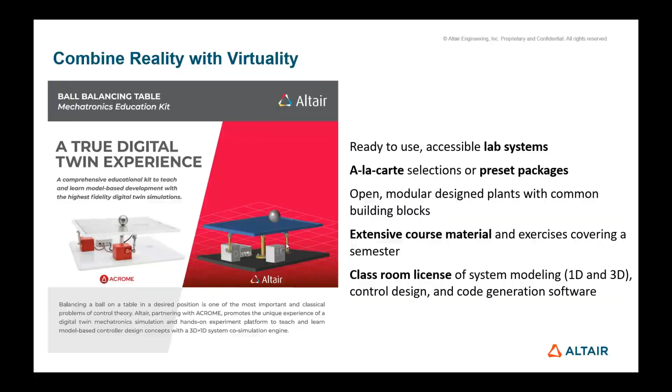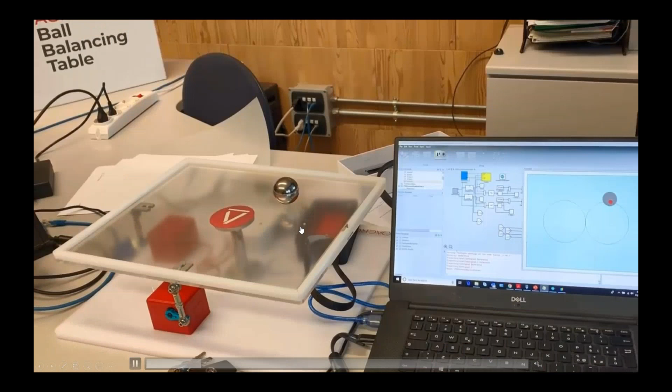I hope you can see the video. It's the ball balancing table, and here you see the control system activated. You can control it by the system itself, automatic control, or manually here.

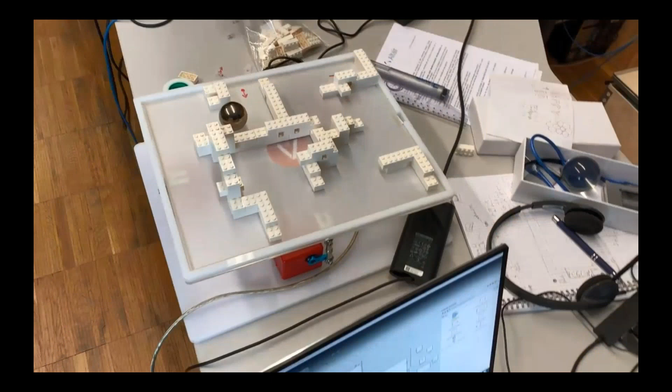See how stable the system works and the reaction time. If you'd like, you can build a challenge, for example for your students, to control the ball rolling through a maze in the most efficient way. That is always exciting for students to see.

By playing with that, they actually learn how these control systems work, how the interaction is between the virtual world and reality, the digital twin.

The second innovative solution we just launched is the combination of a written script, the knowledge, the textbook, and scripting in combination.

When you have a text, for example as a teacher, you'd like your students to read it and understand it. You can do it as before, like a PDF, with all your formulas and method descriptions inside, combined with an active script where you can go in, change the formulas, and see the results later on.

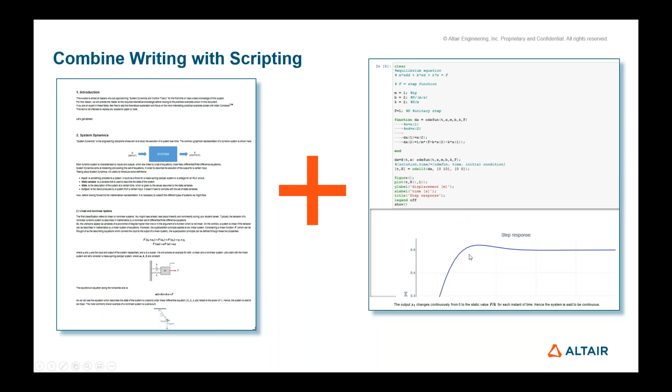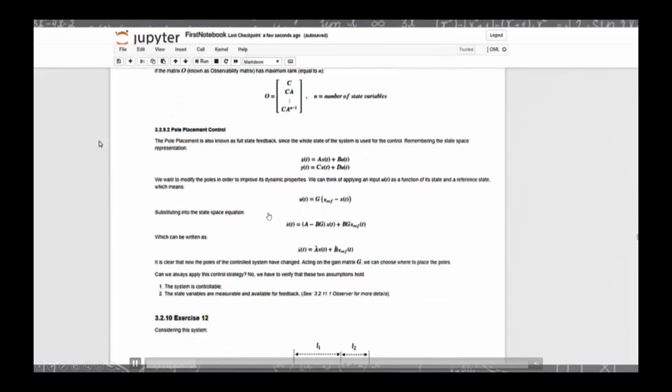This is what it looks like in action. It's a web-based tool. You have your text, your graphs, your math here, and integrated in between, these mathematical formulas become actually living, because you can execute them and see the response, the values, the results directly and immediately.

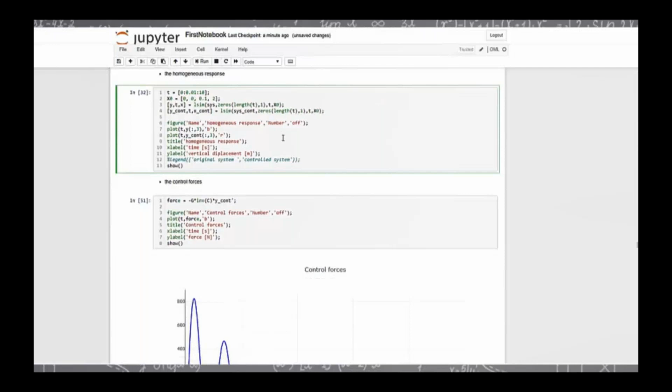Later on, you see how these formulas, these principles that you've learned as a student in the text, get a kind of lively reality. You can compare different parameters, for example of a pendulum, with different damping values, and see how that works.

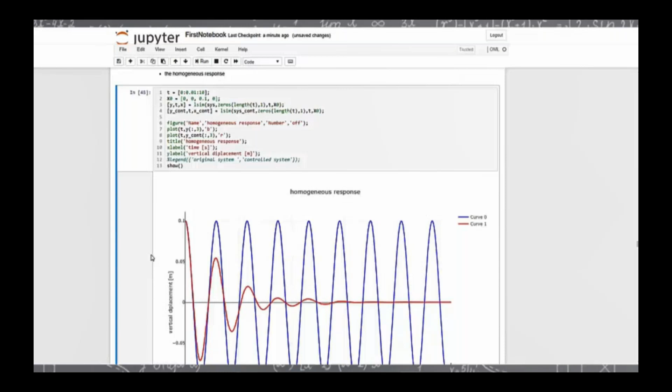As a student, you can combine both: you learn something and you explore by yourself, which is quite attractive for anyone who wants to explore on their own. So, some ideas and an overview of what we are doing.

I'm really happy that with Clive and Charl we have two partners in South Africa working with us together. Clive will concentrate more on classical mechanical engineering and control engineering, and I'm very happy that Charl is exploring new technologies with data science and IoT, which is key in the future. It's very promising that young experts go in that direction and explore all the possibilities.

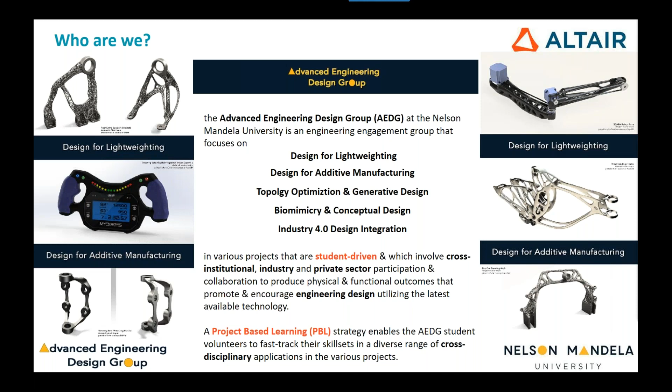Now, first of all, where are we? For those of you that are not too aware of South Africa, we are basically on the southern tip of Africa, and we are based in a town called Port Elizabeth, which is right at almost at the extent of the continent.

Now, in terms of projects, initial projects we were involved in the early 2000s were normal standard university projects like the Baja SAE, which we competed in for many, many years.

But in 2012, we took on a big project in that we designed and developed a solar car for competition in the South African Solar Challenge, which was an international event circumnavigating South Africa on a 7,000-kilometer odyssey over a 2-week period. It was an absolute immense competition to be involved in, and fantastic for the student designers.

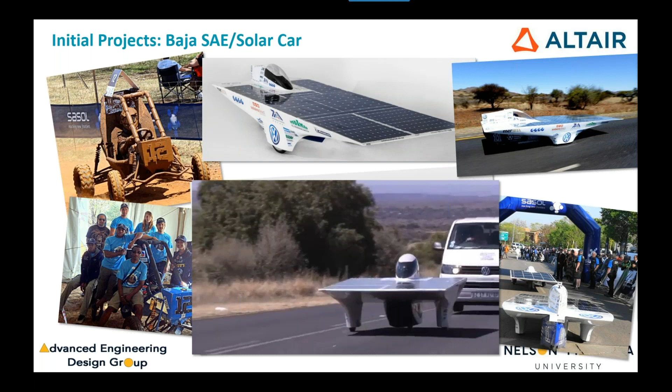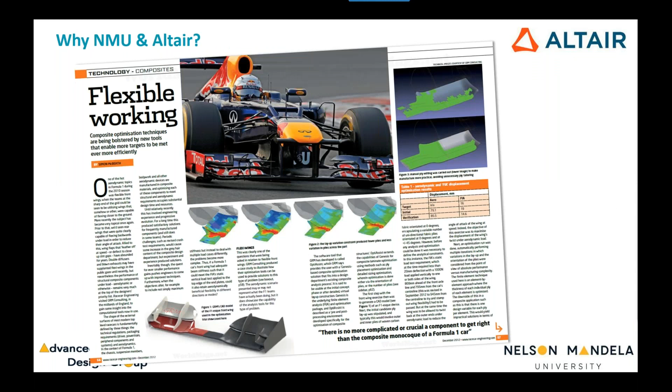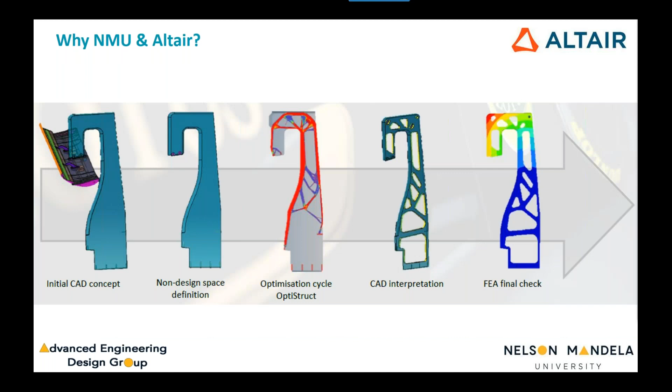This was followed up shortly by a presentation that I saw online for the Lotus LMP2 car, presented at the 2013 ATC, the Altair Technical Conference in Europe, where the rear pillar was optimized using OptiStruct, resulting in a remarkable 54% mass reduction and a remarkable 205% stiffness-to-mass ratio gain, which was absolutely eye-opening.

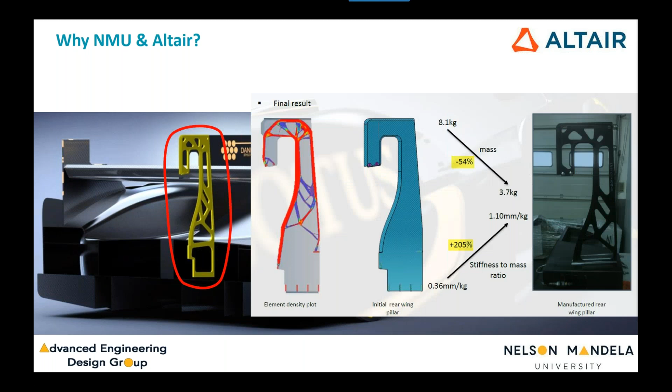This led to me essentially sending an email to Altair in Michigan, and very shortly thereafter, much to my surprise, the local Altair guys got in touch with us, and our whole incredible journey started.

We moved on from this point to a new project in 2014 called the EcoCar, something that happens on the Asian continent, the Americas, and Europe as well. So it's a well-established competition, but this was the very first time it was being inaugurated in South Africa, primarily concerning lightweighting and efficiency in terms of the design.

So our students basically designed a full carbon fiber vehicle here, and having the Altair tools available to us really helped the process in terms of maximizing that efficiency.

As it was, we went on to win the event in the ICE category for 3 years in a row, setting multiple subsequent records along the way. We eventually got Altair on board to actually sponsor the project over the final 2 years, which was really great because it gave the project a little bit of sustainability.

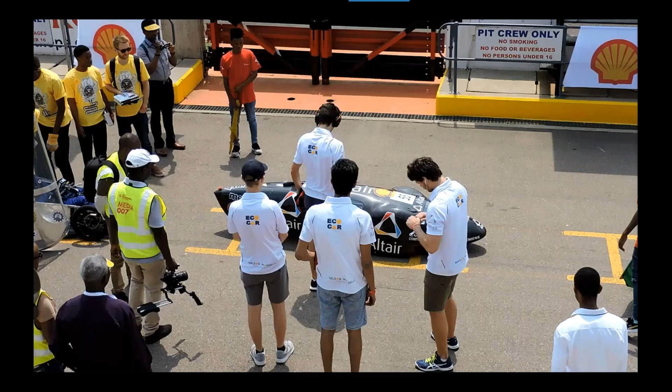In parallel to this, around this time, we also received additional funding to develop multiple online e-learning modules for technical high schools or secondary level schools in the country. And this opened up an entirely separate project area, which then expanded into the development of online modules for mechanical engineering subjects.

We've received excellent feedback from our students over the years that they've been exposed to this, and it has now become a default part of their tuition. We've also provided various short learnership programs, which we call SLPs, for industry and student use as well.

This has obviously become considerably more significant this year due to COVID restrictions. So over the 5 years prior to this, we developed all these different platforms, and they now number into the hundreds. Learning from all the challenges and mistakes we made along the way has proved fortuitous for us, and is now expanding across the entire institution.

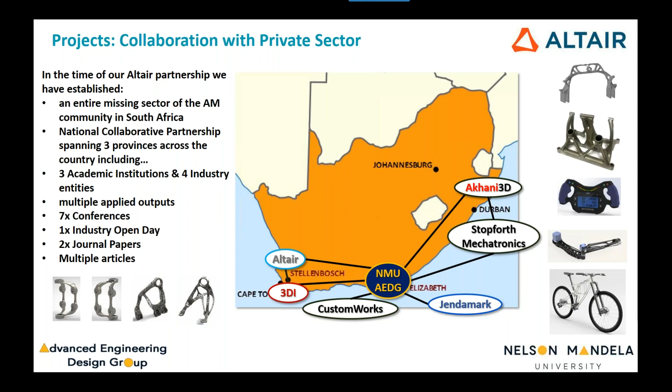There was topology optimization initially in there. Then we used OptiStruct's composite layup optimization capability.

As a result of this, he was also invited to present his work at the 2017 Altair Technical Conference, or ATC, in Frankenthal, Germany. The project was also a finalist for the 2017 National Advanced Manufacturing Innovation Award. These wheels now have been on the eco-car for over 3 years without any issues whatsoever.

One of the unique aspects of the project was that it was one of the first projects worldwide to utilize brand new composite design failure theory in consultation with the originator, who is a composite guru, Professor Stephen Tsai, based at Stanford University. This is the same Tsai that, for those of you involved in composite design, is the name in the Tsai-Wu and the Tsai-Hill composite failure theories. So we were dealing with quite an amazing guy in terms of the development of that project.

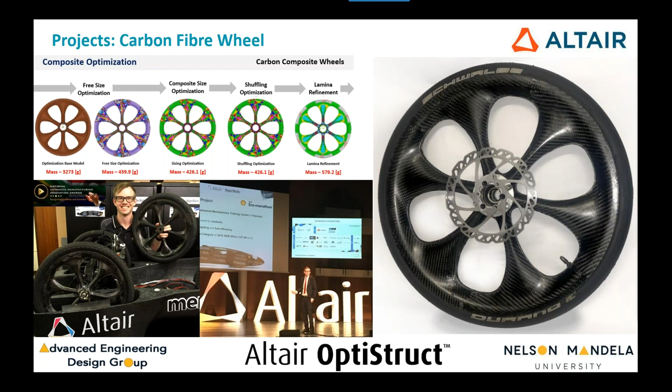Our next little project was a seemingly insignificant one, but it saw our first move into metal additive manufacturing. Despite its apparent simplicity, it was to prove pivotal in moving our future projects forward.

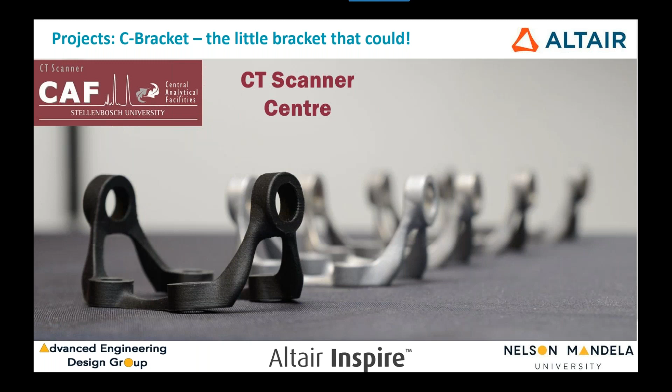We had an introduction by the local Altair guys to Stellenbosch University's CT Scanning Center, and their top scientist there, Professor Anton du Plessis. He was planning a round-robin test of an actual functioning component across multiple metal additive manufacturing centers on titanium additive manufacturing structures, and he needed a quick solution as a test component.

Using Altair Inspire with its superior topology optimization capability, the component was quickly produced and sent off for round-robin tests at 7 to 9 centers, I can't quite remember offhand. The component was planned to replace the original bracket on the eco-car, which was a carbon fiber bracket, and it was really light.

It was at 49.5 grams, but our final optimized bracket in titanium, as you can see there, came in at 29.33 grams, which was quite an amazing achievement.

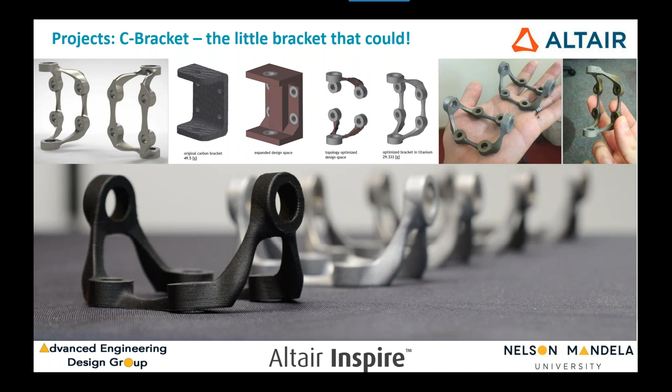This little bracket ultimately resulted in three research papers, and we also hosted an ASME global webinar where we detailed the actual process. It has also shown up at multiple international conferences, some of which we haven't even known about until after the fact. We just seen that our little device has been shown there, as well as this very nice article that you see on the screen in the Metal Additive Manufacturing magazine.

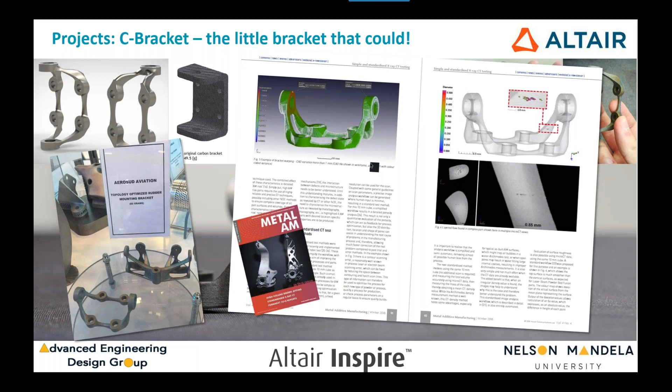The next project, for rear drive support on the eco-car, was our first major foray into lattice design as part of a lightweighting strategy. It proved to be a valuable learning process in terms of design challenges for additive manufacturing and the challenges one faces when employing lattice design as part of a strategy.

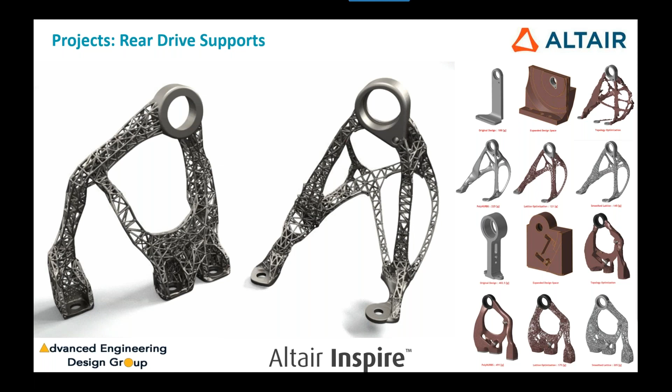The results were very beautiful and rather strange, and to everybody, including ourselves, it seemed like they wouldn't even work, despite all the simulation and analysis behind the design. But they were installed onto the eco-car, and they exist there until today, and we won two of the national events with the structures on the vehicle where they performed absolutely perfectly.

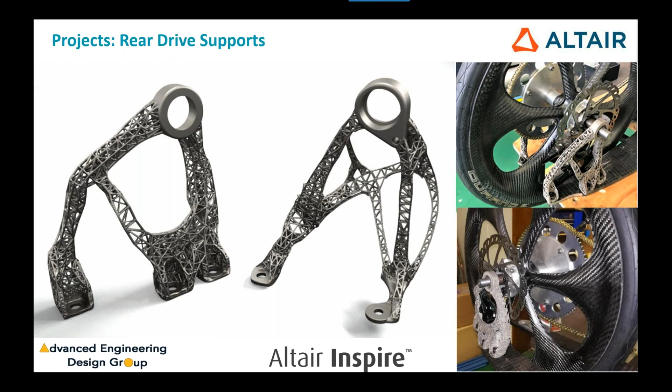The next project was as a result of a need to replace a rudimentary steering wheel in the eco-car with a solution that was custom designed to include integrated telemetry and cabling, an ergonomic custom fit for the driver with all driver controls within finger reach, as well as a quick release mount.

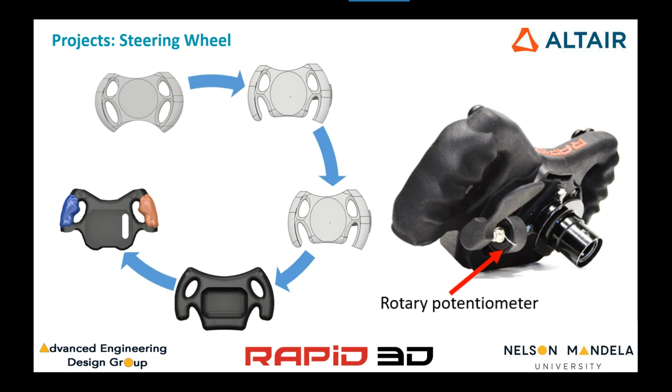We did multiple design iterations here, and the final design was printed by Rapid 3D in polyamide nylon on a 3D Systems Pro X500 and dyed black using their DyeMansion machine. It featured internal ducting for electronics, telemetry controls, and a minimized lattice infill to keep the structure as light as possible, as well as featuring a paddle throttle behind the steering wheel main facade.

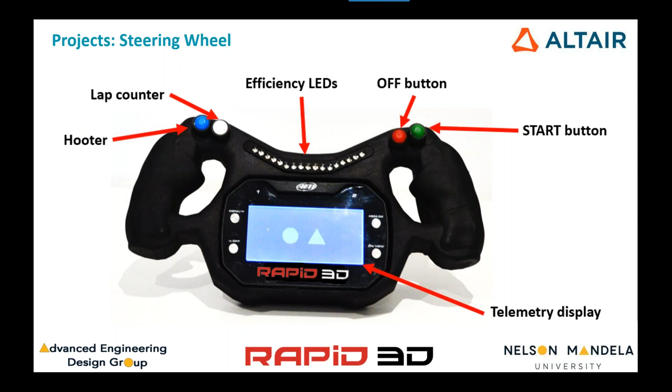This next one, I apologize for going through quite quickly, but we're quite tight on time, was hatched at the 2018 RAPDASA conference, an additive manufacturing conference in South Africa, at the suggestion of Prof. Du Plessis. The objective was to produce a bespoke titanium mountain bike frame that could be printed in one piece without welding, which at the time would have been one of the largest metal titanium 3D prints in the world.

The student involved in this was Byron, and he was able to do this project as part of his BTech qualification. So we were able to kill two birds with one stone.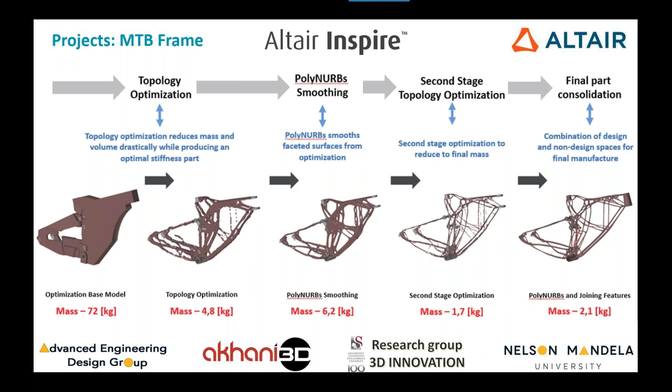It was a very complex project, and it really pushed the limits of the software capability at that stage, based largely on a topology optimization strategy using the international codes for these type of applications. It resulted in a very beautiful design that again defied logic in terms of its capabilities, and it would be producible at a competitive price compared to top-of-the-line carbon fiber mountain bikes currently in existence.

It was completed with the collaboration of Akhani 3D and the 3D Innovation Research Group at the University of Stellenbosch, and it also featured in a starring role at the 2019 RAPDASA conference, where Byron presented his work, as well as at the 2019 African Advanced Manufacturing Conference.

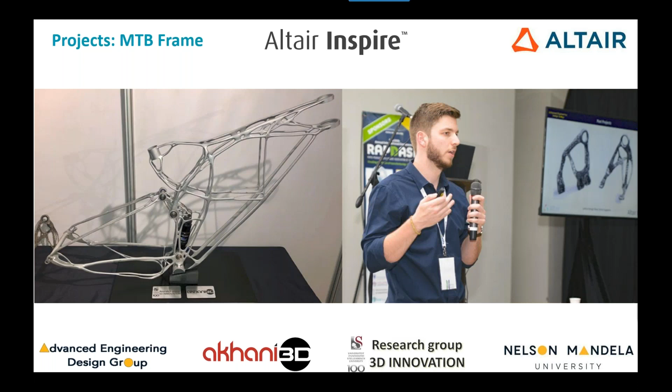Furthermore, we entered into the Purmundus Challenge at Formnext, held in Frankfurt in 2019, and the design won the Public Choice Award, which was really an outstanding accolade for the amount of work that he put in.

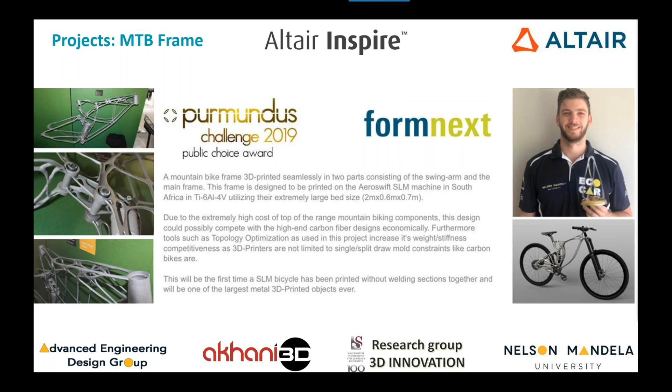The very next project, and this strange-looking device here, was a metal additive manufacturing project necessitated by a rule change in our eco-car competition, which required foot-activated brakes on the vehicle for future events.

The objective was to design and manufacture a one-piece brake support structure that was lightweighted to the extreme. It could take all the required loading, and could fit seamlessly into an extremely confined space within the eco-car, yet integrate into already existing braking components. The project proved to be an excellent design for additive manufacturing project, and helped seriously advance our knowledge base in this area, as we were going to hit multiple stumbling blocks in the design process.

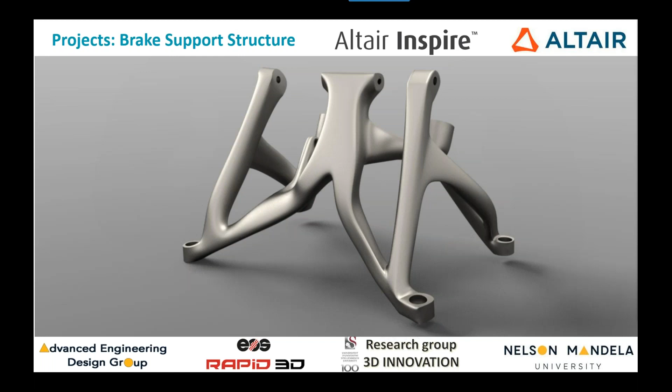Quite late in the project, we realized that the existing design would be very expensive due to the significant support material required in the print. So a last-minute redesign phase was undertaken to completely eradicate these supports externally and severely restrict inner supports as well. This reduced the additive manufacturing cost by 75% from the initial design, which was absolutely amazing. Because of time constraints, we also left some more percentages on the table.

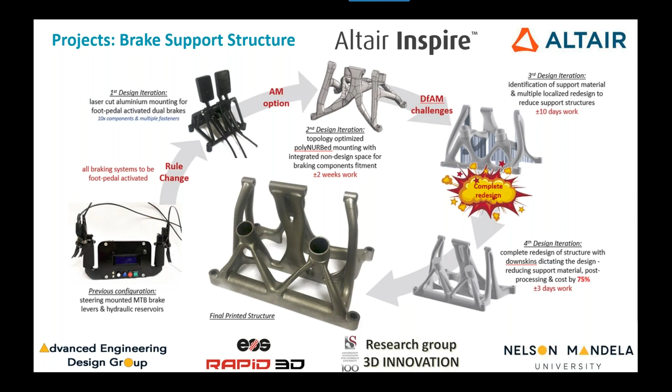Again, our collaborators, Rapid 3D and the 3D Innovation Research Group, were invaluable in getting this project to completion, and the structure you see on the screen was printed on Rapid 3D's EOS M290.

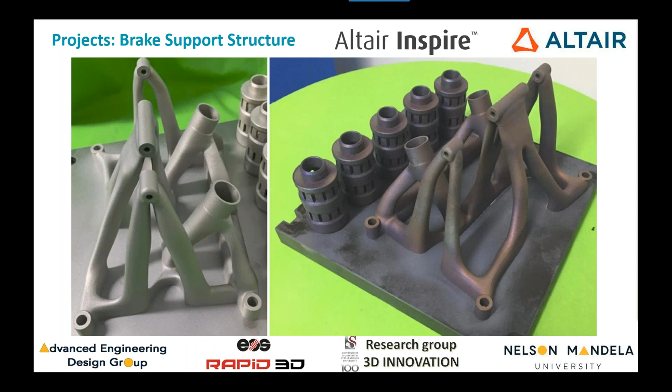We also presented this at the 2019 RAPDASA conference, and it won an award there for best design in the transportation category. You can see the designer Zahid there, he's our current team leader, and it is currently fitted into the eco-car.

Now, our next project here is an inherited project which has only been partially developed, intended for both competition and the international Cybathlon event, as well as long-term development of a cheaper prosthetic for amputees. The picture we're seeing here is still very much in development, in its early phases, and there's much work to be done by the end of the year.

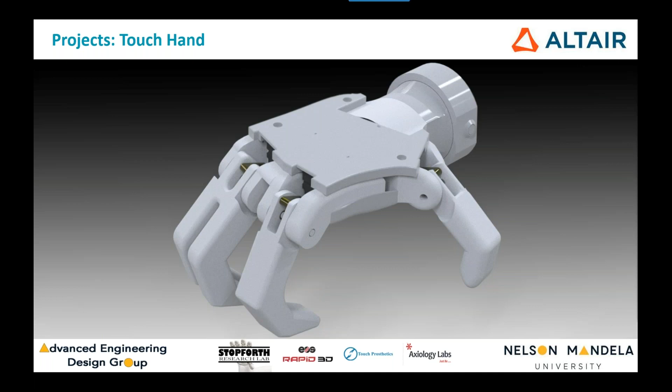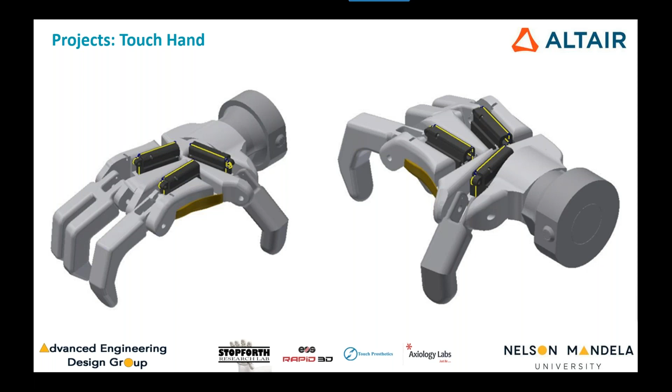The project is broken up into three distinct sectors: the hand, the wrist mechanism, and the socket, all individual parallel design projects in and of themselves. The final screen you see here is the socket. We did a detailed scan of the current amputee's arm for bespoke socket design, which was then 3D printed out and is now being used as the basis for development of the actual socket itself, and will continue through the year.

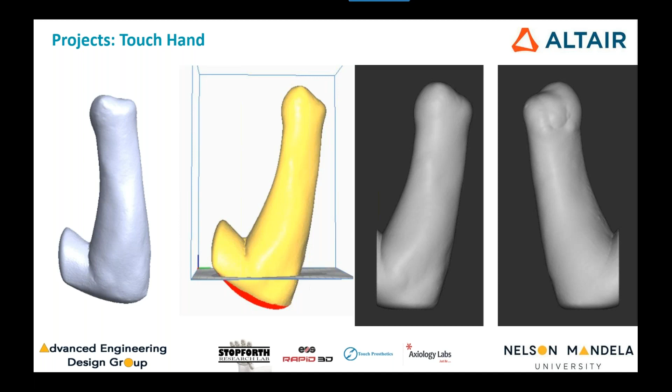This project was COVID-driven as a result of urgent need by the anesthesiology doctors at a local hospital to help with containment of aerosolized droplets when intubating patients for in-theater procedures. While there are many of these devices floating around worldwide, very few focus on extraction of aerosolized droplets, and thus become infection focus zones, providing a serious risk to healthcare workers.

This was actually a remarkable project because, although simple in appearance, it was quite involved due to the constraints within the theater itself, as well as the procedural requirements from the doctors. Furthermore, what hindered us was that the students were all under shutdown at the time, so the entire project, including the prototype, had to be completed remotely. This was done in an amazing 6 days.

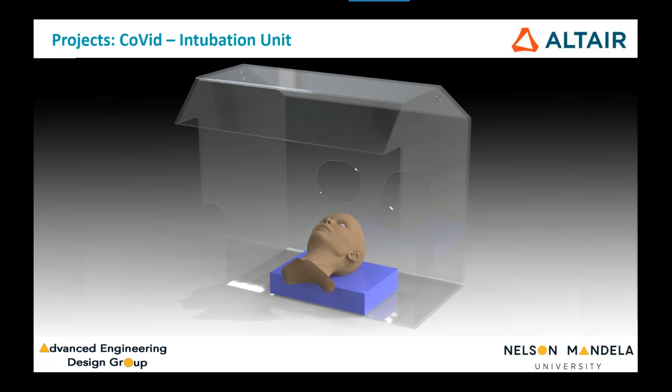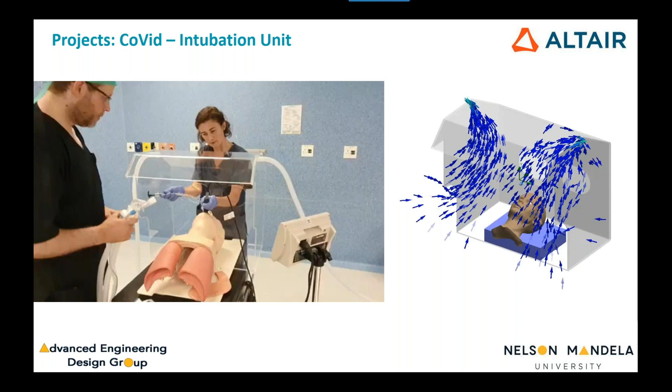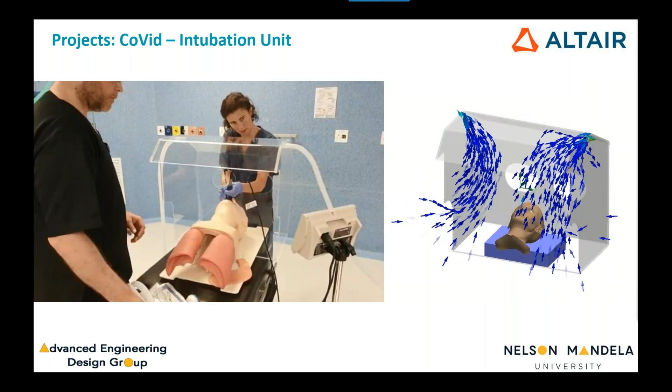At this stage, the prototype was tested in theatre by the anesthesiology staff, who recommended small upgrades and improvements to the design. Finally, after a lot of red tape involving medical equipment, funding was secured from a local government agency, and the intubation unit was recently deployed to the hospital, where you can see doctors fist bumping as per social distancing requirements on first delivery. It is now planned to access further funding to roll these out across the country. There's also a patent being applied for by our licensed manufacturer in this respect.

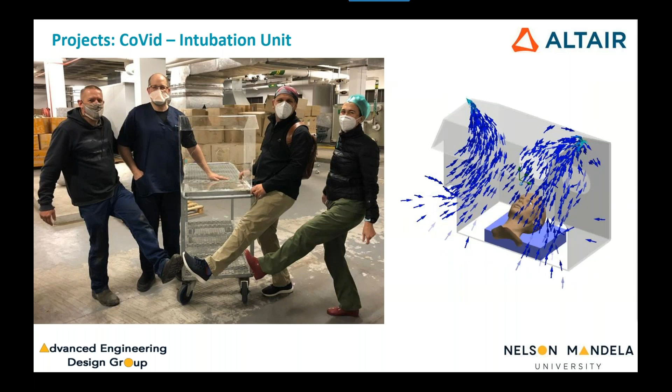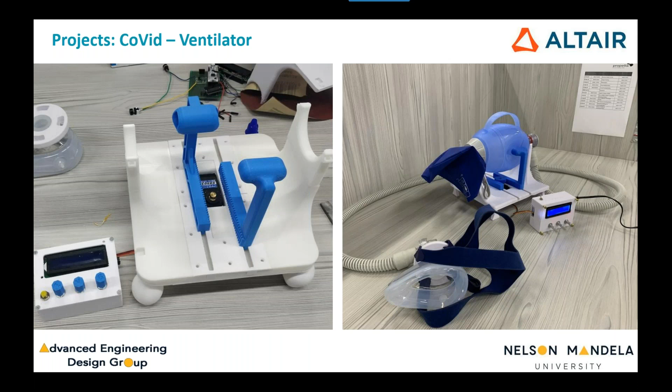A secondary issue in COVID response is this amazing project, started by some of our students due to an urgent need for ventilators in this country, something we're being challenged with across the world. These students have started their own startup at the NMU incubator facility and began development on the device just prior to the national shutdown. They've already gone through multiple phases of registration and are the most advanced ventilator option in the country presently, in terms of being in the final phase of approval for production.

The current ventilator is well beyond a standard CPAP device in its current configuration, and we have just sourced further funding to expand the development into a full BPAP device for mass distribution around the country.

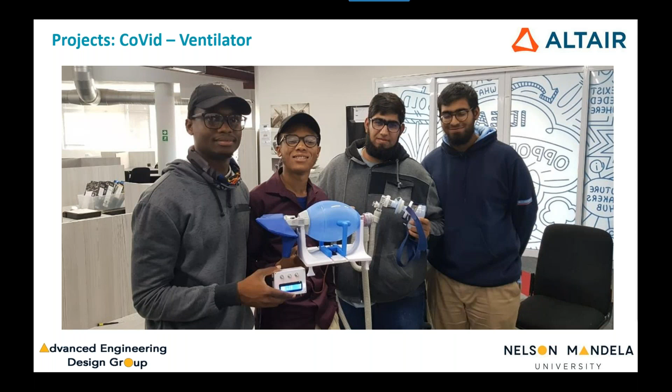I just want to take a sideways step here into engineering tuition and the challenges we may face. We all know universities are difficult to and reluctant to change in a lot of respects, for the simple reason that change does have implications.

Our qualifications are very complex things, and they're all intertwined, so any mercenary actions by academics in any modules can have significant effects. Added to that, we also tend to find that some academics can be quite obstinately stubborn to accept change, although that only applies to some. Hovering over that and anchoring it is the fact that our content is largely sacrosanct and built on a fairly rock-solid physical platform.

There's no ignoring the overload faced by both academics and students, but we're all challenged by an urgent need to stay relevant in the face of rapid technological changes. This is where the Altair platforms can really help facilitate that. We're right in the middle of a technological revolution, and the further advent of the fourth industrial revolution approaches us like a freight train.

So in terms of our group, we have embraced specific focus areas that we consider to be game-changing, and that is additive manufacturing, lightweighting and optimization, the Internet of Things, data analytics, and AI and machine learning. These last two items I'm going to return to a little bit later.

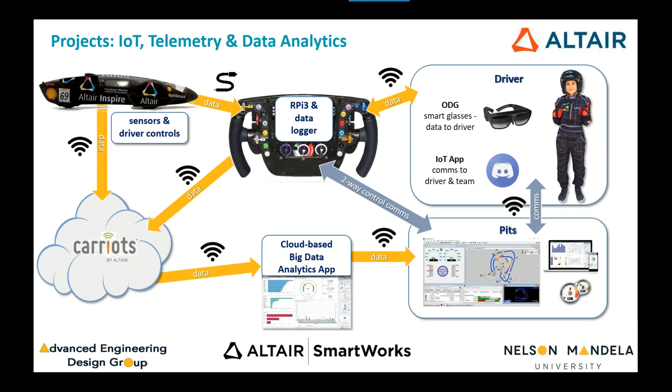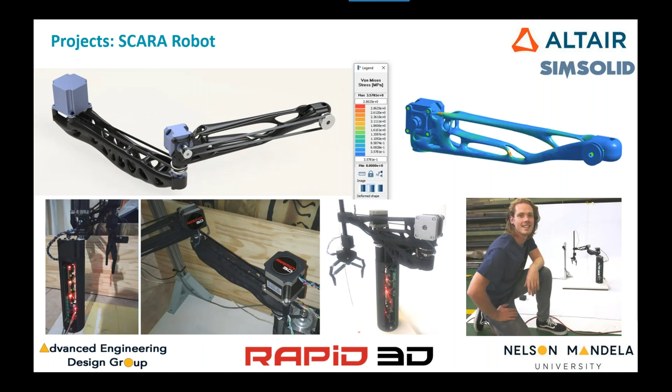It also featured a really unique and very cool compliant mechanism for the robot gripper, which was printed all in one piece using 3D printing, and this was facilitated by our collaborators at Rapid 3D.

The entire robot could be controlled by an app on a cell phone, and it was demonstrated at the 2019 African Advanced Manufacturing Expo, and it so impressed a director of a local company that Charl was able to get a job directly from his work on this project.

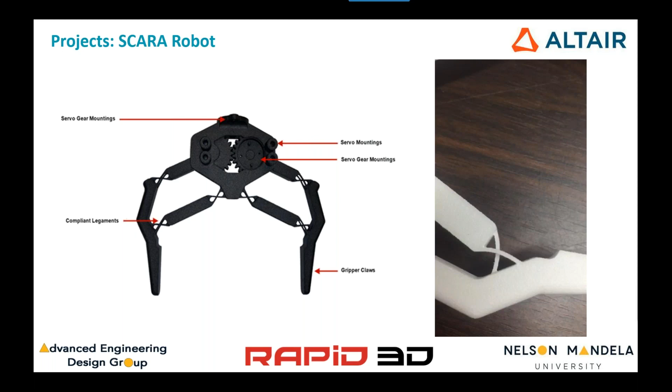This leads into our very latest project, which involves real-time manufacturing data analytics, which is really cutting edge. It also happens to be a significant strategic focus of Altair worldwide in terms of their new suite of packages. I'm now going to put you in the capable hands of Charl to give you more detail on the areas where his master project is going to go on this fascinating subject area.

Thanks, Clive. The concept of the project is to develop a Cyber-Physical IoT system to support real-time and cloud-based predictive data analytics and process optimization.

The intended system comprises three major components, the first of which is the development of a smart IoT sensor to non-invasively gather and process data from the mechanical process and wirelessly stream this data.

The second component would be a cloud system where the sensors are managed and their data is ingested into the cloud, processed and stored. The third component would allow for the visualization of the data remotely and in real time. Sensor networks form the physical component of the cyber-physical system.

Without penetrating the automation layer of the mechanical manufacturing process, the sensors are designed to extract the process information based on metrics such as vibration, temperature, humidity, and pressure.

The sensors process the data, performing analytics such as spectral analysis and data aggregation, and then these results are wirelessly transmitted into the cloud.